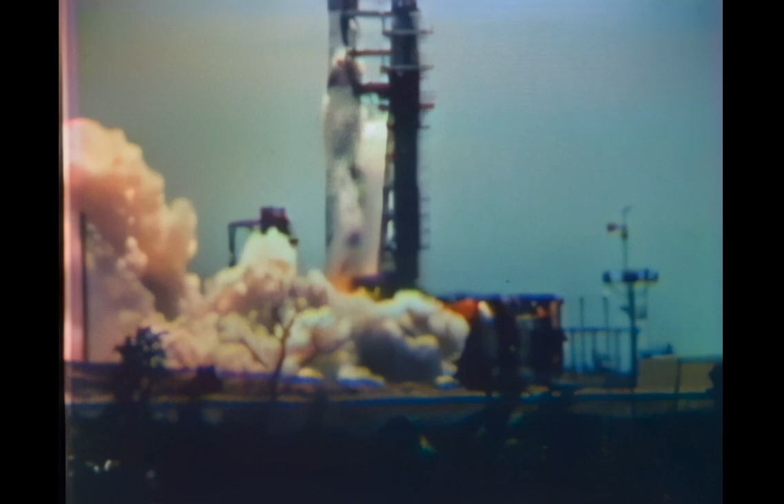And if it is theirs, and this is ours, a better design on the drawing board is no immediate effective countermeasure. Our birds must fly when they're required to. The high complexity of modern-day weapon systems demands the closest possible approach to absolute reliability. There is no second chance. So there must be absolute process control during system design and system manufacture.

Are these more imports from other lands? Or are they more exports of our own manufacture? If we are to compete successfully, both at home and abroad, our economy must expand, our industry modernize, to remain strong, to remain free, to enjoy the good life.

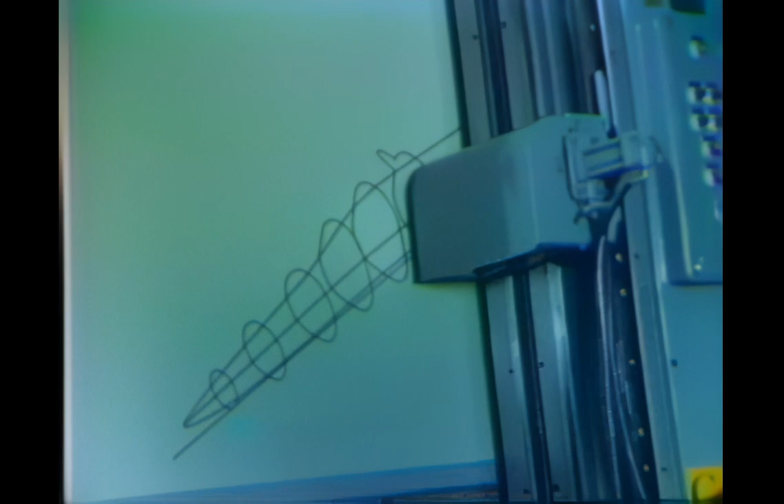We also need newer and better aerospace vehicles, and we need them fast. We need newer and better weapons, and we need to get them from design concept and into operation more quickly, and at a reasonable cost. We need new and better products for civilian consumption, products which can compete with foreign goods here at home or in foreign markets.

We must have modern manufacturing, as modern as we can make it. Modern manufacturing is a command performance. Command performance. Well, we usually have enough command of our process to get the performance we want.

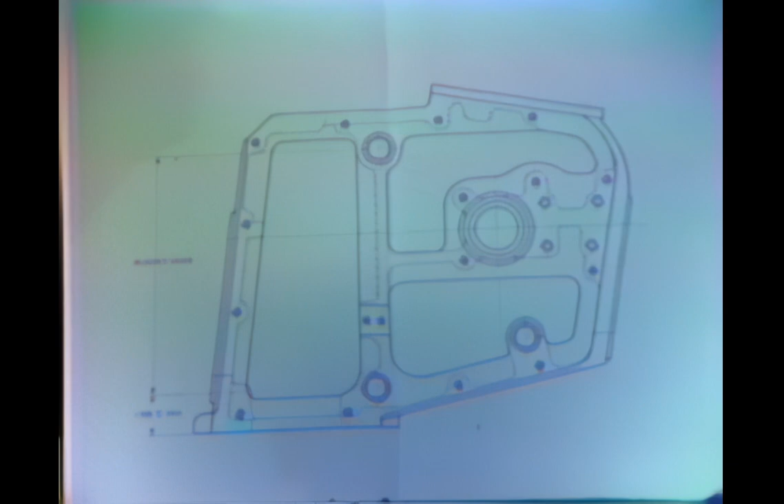Of course, it takes a lot of time to get from a set of new drawings to a finished product. But time is something we don't always have. The period from development to product is growing shorter and shorter. As someone said, time has collapsed.

Now let's try this process. Say the complete product is a Type 20K, and we're changing it with a modification of the Type XR. Now suppose all you needed to do was to say into a transmitter, 3 Type 20K modification XR. Orders to the plant. That's right. You merely define what you want, and in a fraction of the time it would take conventionally, your product's manufactured, assembled, and ready to ship.

And that component we were talking about is only one of many making up the complete product. Well, how could you do all that so quickly? Not only so quickly, but in much less space. You'd need a much larger plant to do this by conventional methods. Oh, this is not conventional. Not at all, this is a modern plant. Really modern? What do you mean by that?

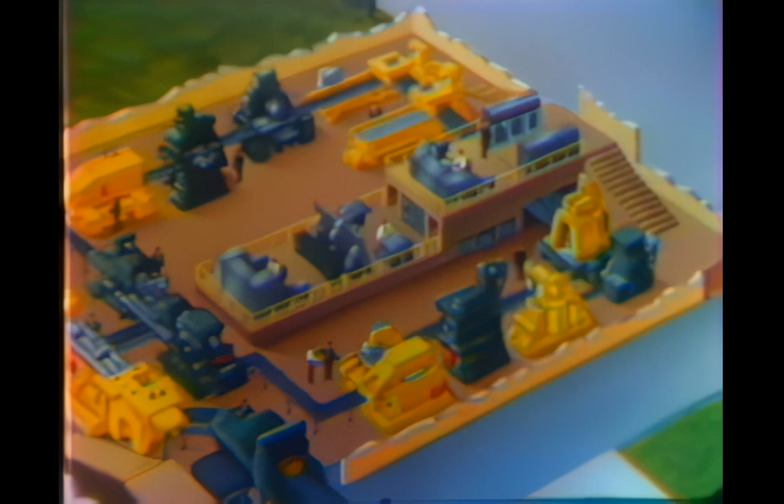When you give your command over the mic, which may be in the plant or remote, almost anywhere, the information feeds into a voice converter, which translates your language into a language which the computer can understand. The computer analyzes your request, then draws on its store of information to produce a series of tapes, which feed into a production control center. This center not only controls each of the machines, but the flow of parts as well, acting as a scheduling unit.

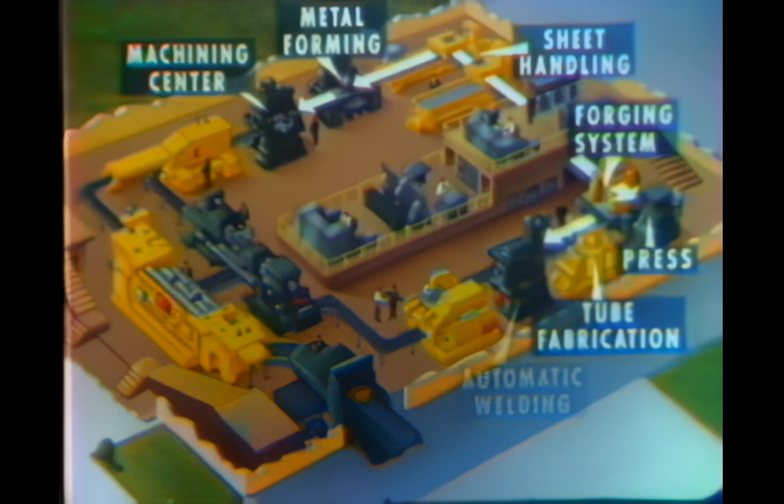Now all of the manufacturing units are actuated. Basic shapes are routed to production centers for complete processing. Completed components are then checked automatically by inspection machines, then sent on to a robot subassembler. Subassemblies proceed on to a robot for final assembly, and then on to shipping. That's what I call command performance.

Of course, I've oversimplified the process a bit. You mean you've been putting me on, don't you? Not exactly, this is not as fantastic as you might think. Take the computer, for example. Computers are fairly common today, although we still must talk to them with cards or tape rather than directly. But they're getting more sophisticated all the time.

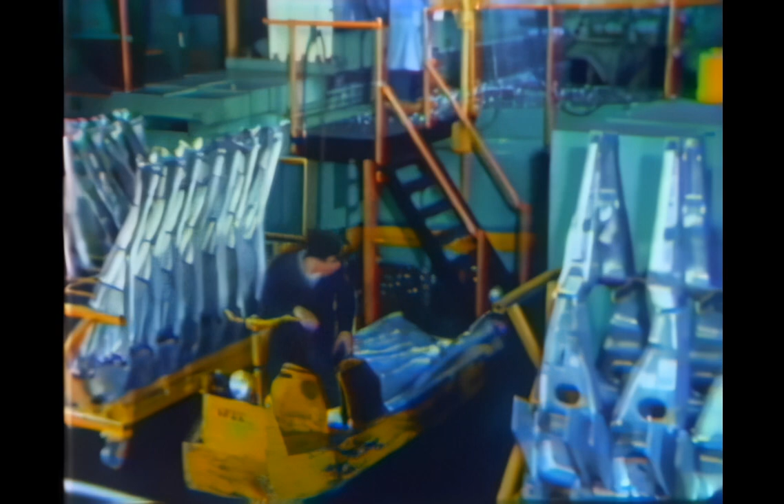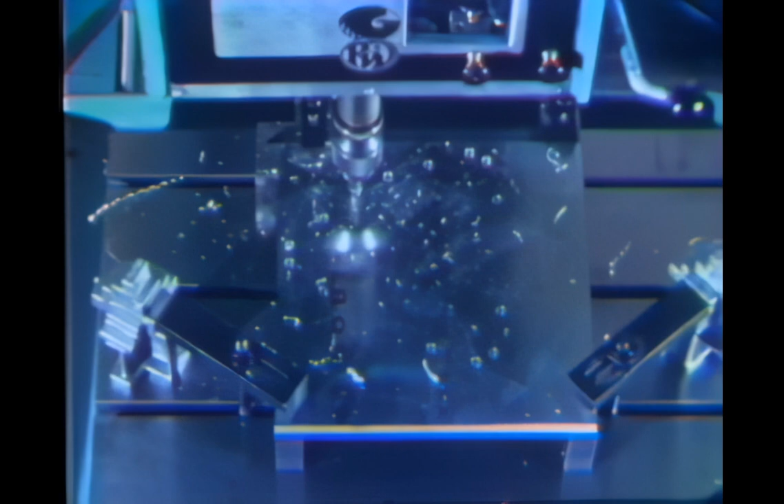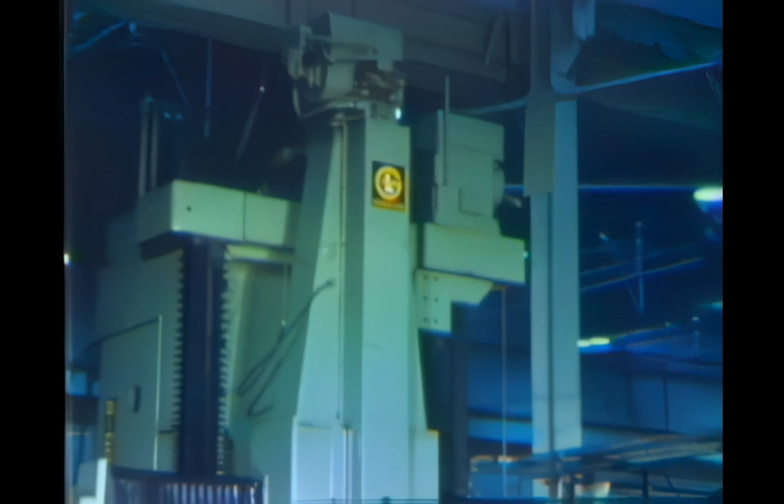And from this information, a control tape is produced. Control tape for what? To control a manufacturing process. Now these machines are in existence today: inexpensive tape-controlled drill presses, the more sophisticated turret drill presses, vertical turret lathes, capable of high-accuracy contouring.

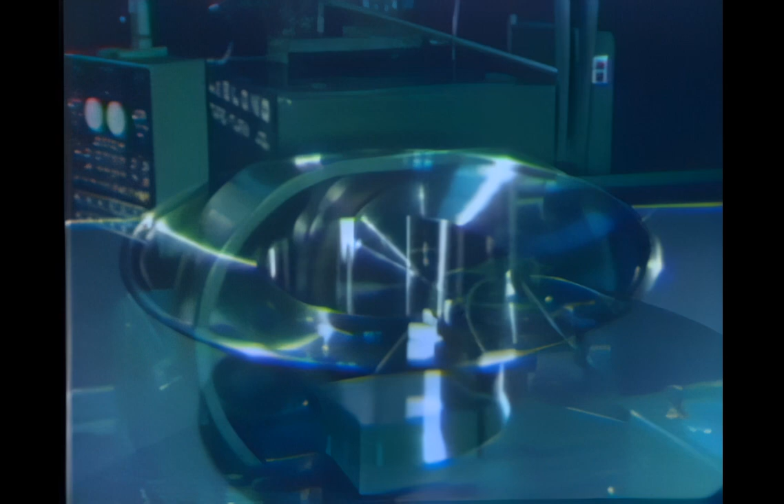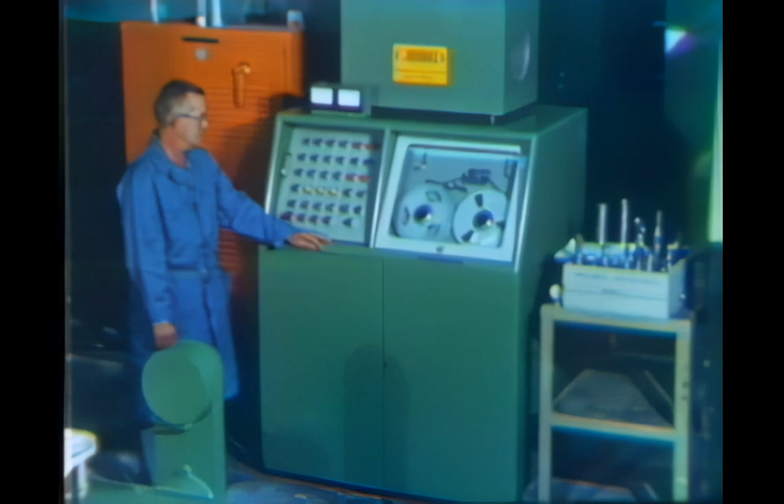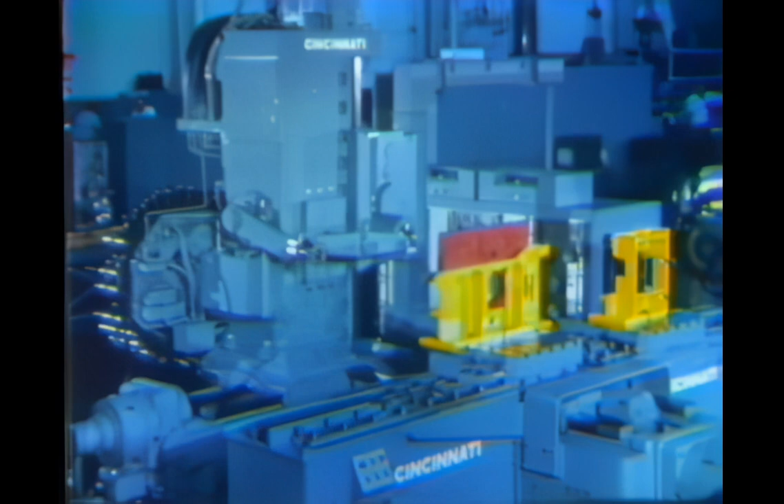Tape-controlled engine lathes, with equally exacting contouring and thread-cutting capabilities. High-precision multi-axis profiling mills. Machining centers that change tools, mill, drill, bore, ream, and tap. In many cases, they can complete the entire manufacturing process in just one setting, fully capable of doing that job of yours we were talking about, and even more.

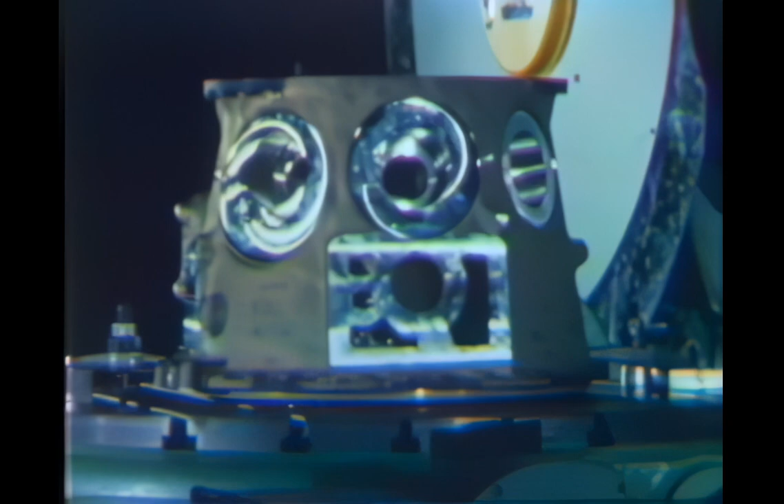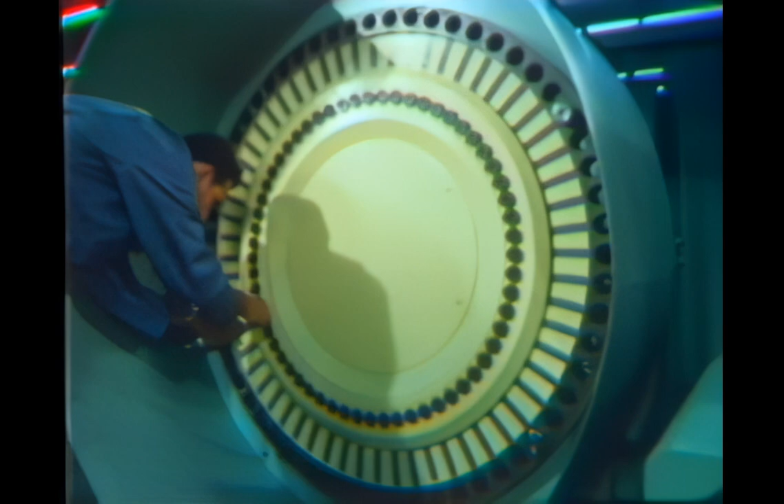Now, what different tools would you need for this piece? 6 different milling cutters, 4 sizes of drills, 4 reamers, 6 taps, and 4 boring bars. And where you needed 8 machines to use these tools, the whole batch is loaded into a magazine for use by this one machine.

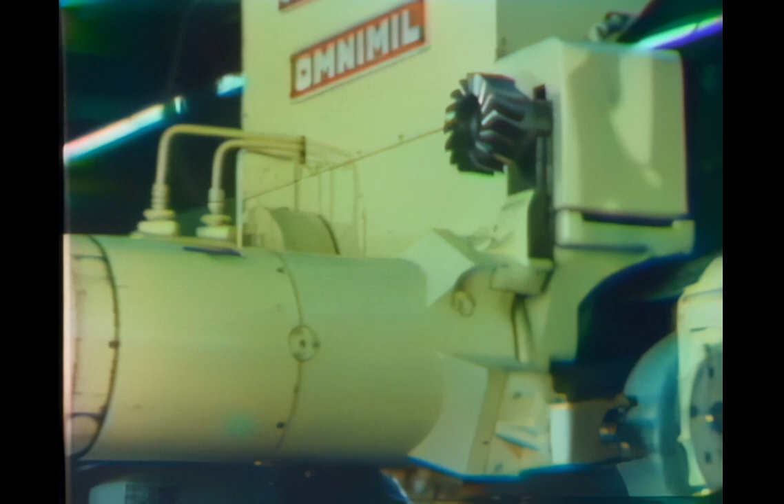All the instructions to the machine are on a punched tape. The intelligence on the tape tells the machine exactly what to do. This is called numerical control, which is one of the means of using mathematical definitions to furnish intelligence a machine can understand. There are many methods of accomplishing this. However it's done, it certainly shortens the chain of command and greatly reduces the opportunities for a breakdown in communications.

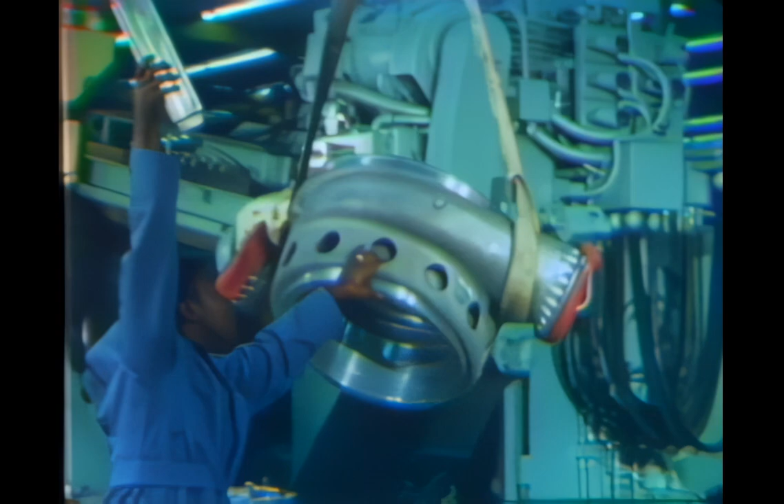There's the same casting you would have started with in your conventional shop, but notice there's only clamps required. The machine itself will even make its fixtures from tape control if necessary. And there you are—all the machining done in only 45 hours.

How long would it have taken in your shop? About 300 hours to machine and 26 weeks of lead time, after you've tooled up. Remember, the lead time here was only 2 weeks. If you need a second, third, or fourth piece, you get them in a matter of hours, all exactly alike. Now that's performance.

What happened to automatic inspection you were dreaming about? That was no dream—they're already in existence too, and research and development are making them better all the time.

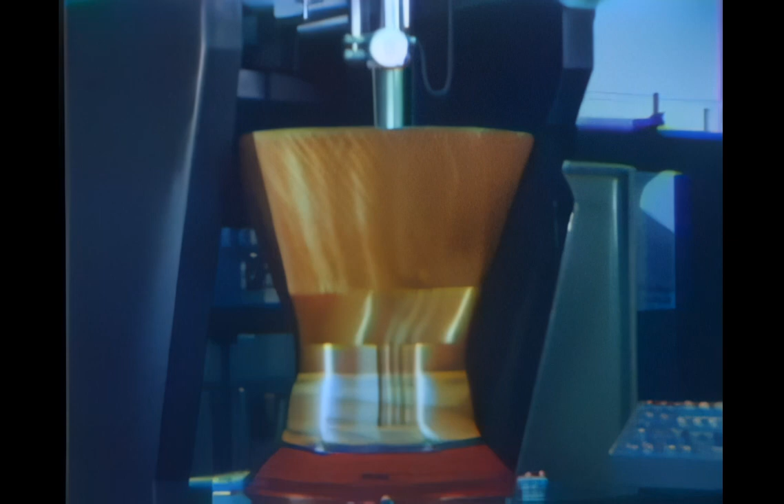On this machine, a probe is guided by a tape similar to the one used in manufacturing the part. The measurements are recorded for inspection and record.

But you still need an original detailed drawing, don't you? Not necessarily, but if you want one, it can be made from a numerical control tape too, operating an engineering machine. Often the drawing can be made at the same time the part is being made, using instructions from the same tape.

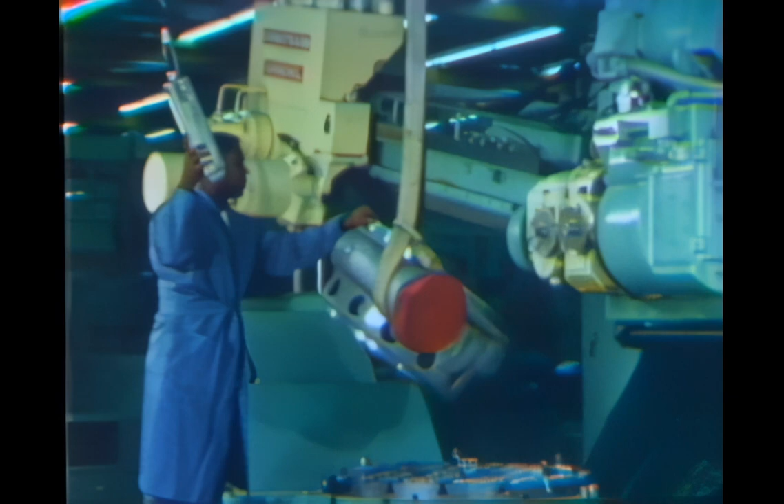I noticed the loading and removal from the machine is still conventional. But it needn't be—you'll find automatic loaders and transfer mechanisms on a lot of production lines today.

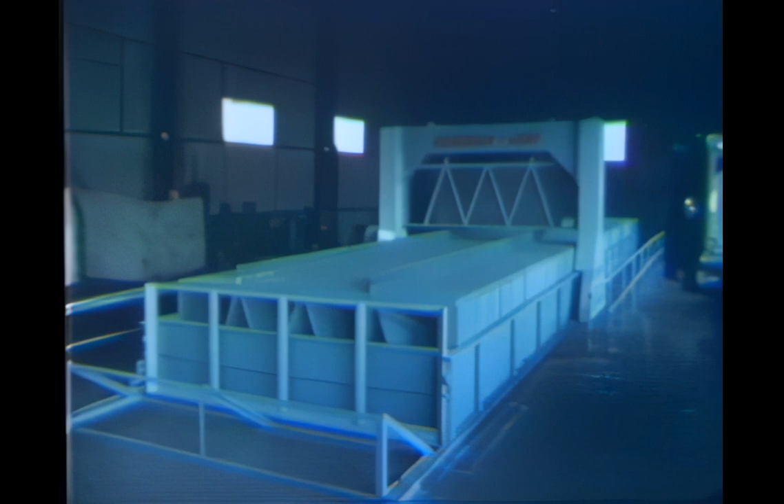This automatic material handler remembers every sheet in its inventory and will deliver it undamaged in seconds.

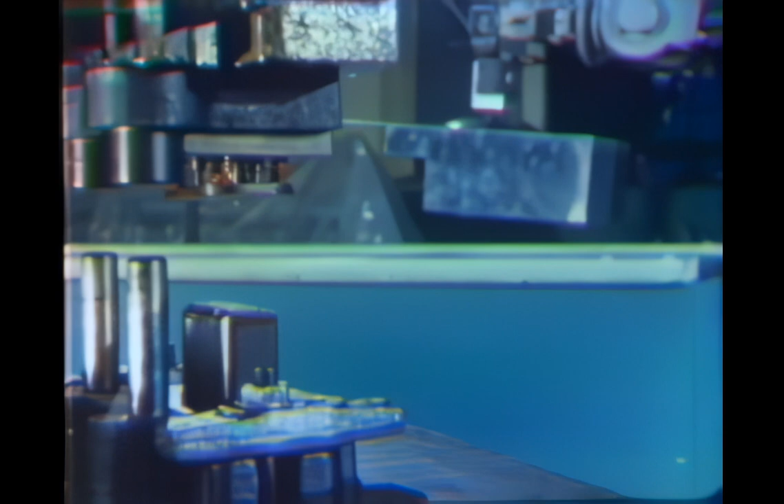This robot manipulator will perform a variety of handling operations. It can be easily taught to load, unload, and assemble parts because of its electronic brain.

So you see, we have practically all the elements of our plant of the future. It's just a matter of time before someone puts them all together to make the dream a reality.

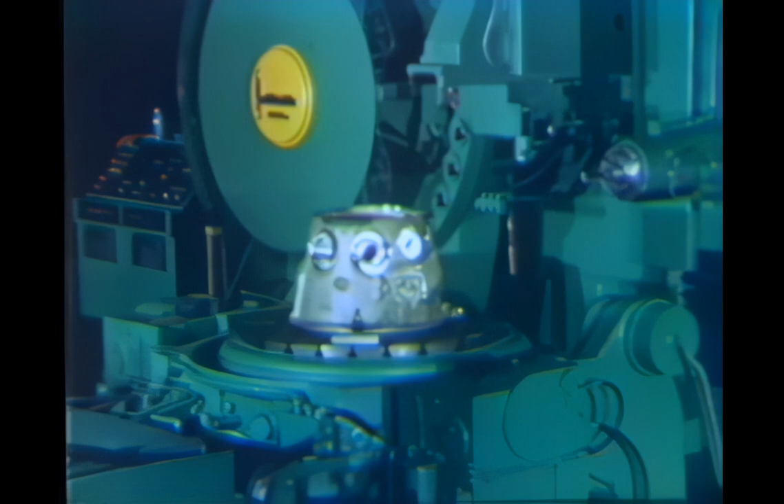I don't know that anyone has ever produced a crystal ball on one of these machines, but you don't need to be a fortune teller to realize that our success in aerospace depends upon our national capability to produce combat-ready systems with complete reliability. We must produce first, best, and at the lowest possible costs, which are consistent with reliability and reproducibility.

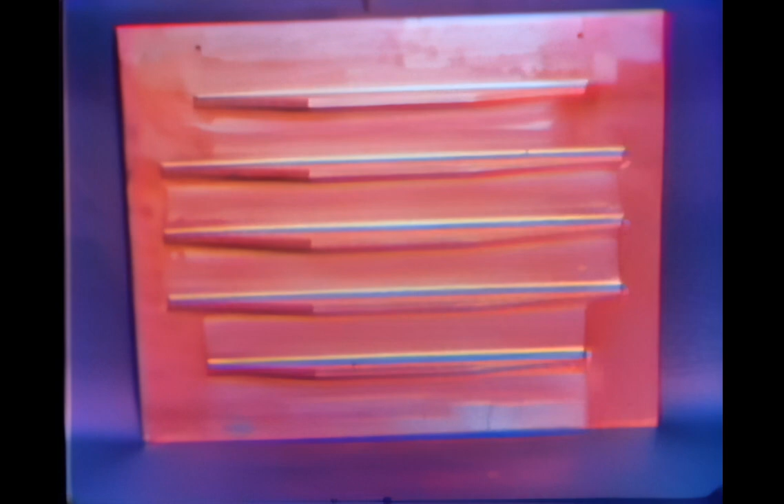This means that we must be able to manufacture from all sorts of new and exotic materials. It means we must be able to produce structural members with a high degree of configuration complexity. It means we must produce with greater dimensional control.

Some large rocket engine inducers, for example, can't be produced to design concept by conventional manufacturing methods. It means that we must produce components which have structural integrity.

This aircraft bulkhead was built up of over 90 different parts, requiring more than 1,000 rivets and high-strength fasteners. You can imagine how long it took to tool, machine, and assemble all these parts, and you can imagine the possible human error involved.

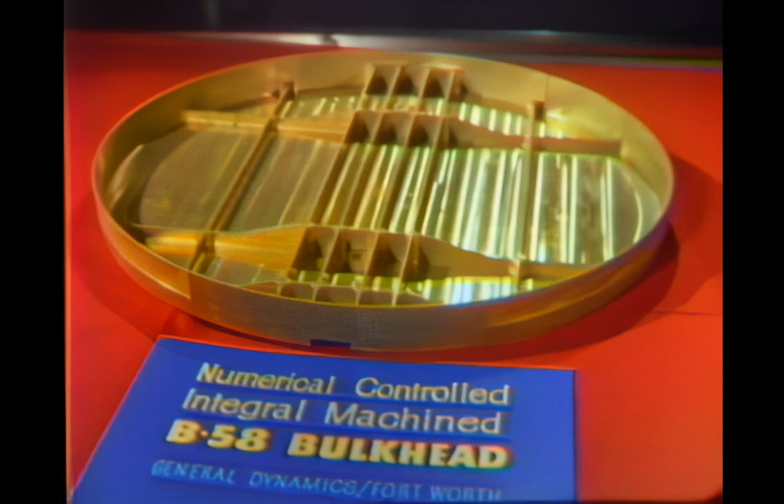The more modern one-piece bulkheads have greater structural integrity, but they were still expensive. These one-piece bulkheads were first produced by conventional methods, using specially designed tracer-controlled rotary tables with many coordinated overlay templates and tracer patterns. It took 160 hours of machining time to produce one bulkhead, and at considerable cost.

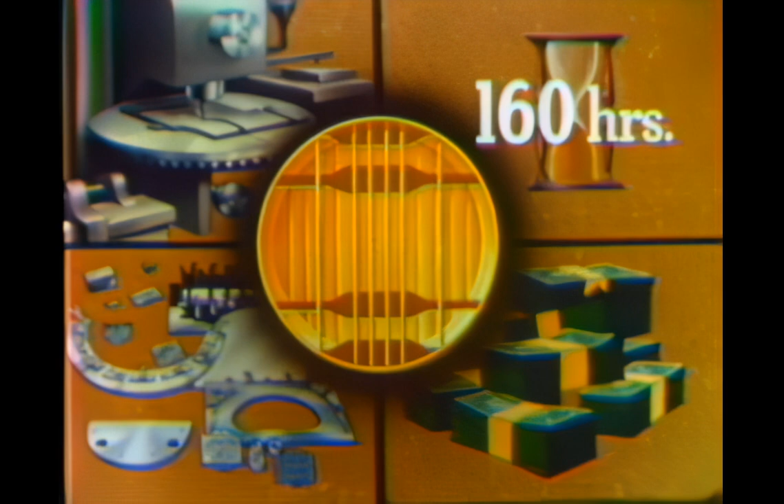The part is now programmed on a numerically controlled skin mill to machine 2 at a time. This requires only 2 sets of vacuum chucks and 9 reels of tape. The time is reduced to only 9 hours per part, and the cost reduced by 80%. In addition, there's a 25% reduction in weight.

Command performance? I'll say. But you can best get it with numerically controlled machines.

Can this type of control be applied to other types of machines? Certainly. There are machines that automatically position and punch all types of panels.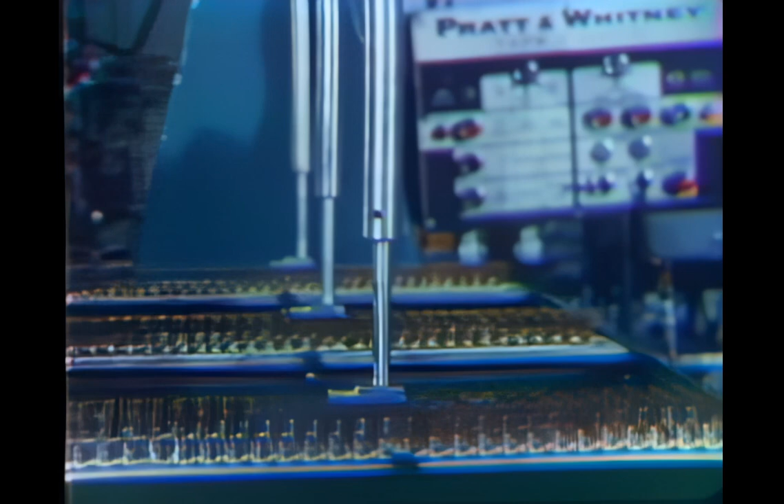Machines that position connector panels for wiring. Machines that position and mate the wiring connections on assembled electrical panels.

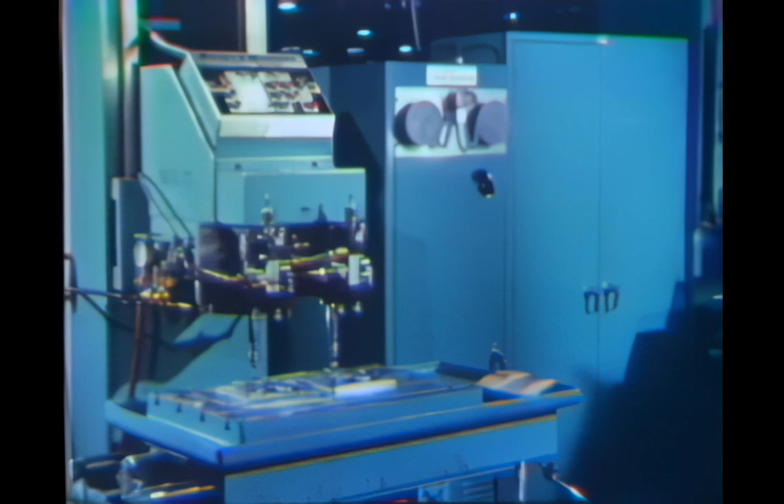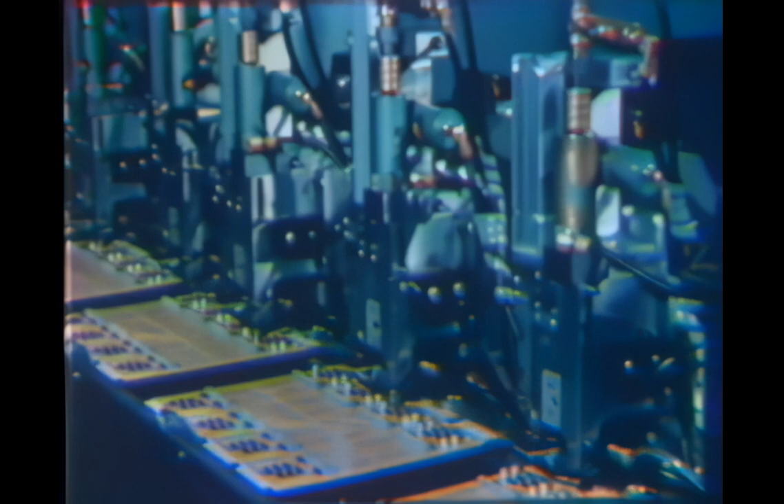Machines for drilling printed circuit boards. Machines for inserting the components in these boards.

Machines for spot welding, which saves 72% in labor costs. This machine has proved invaluable in spot welding fuselage sections.

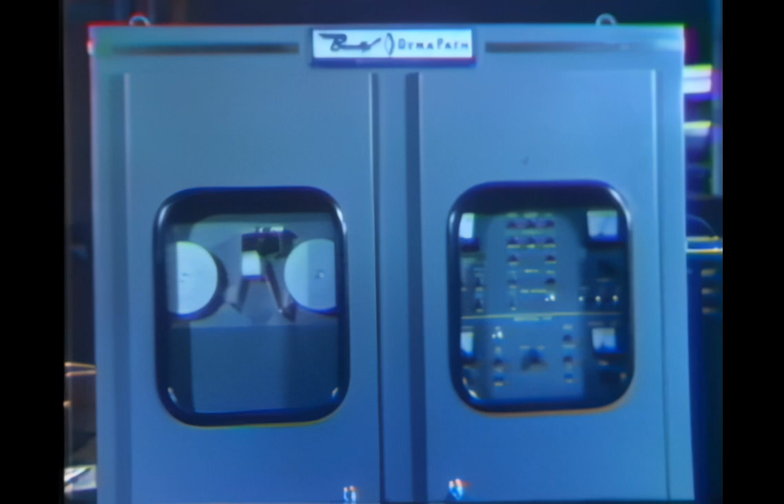The more complex fusion welding also can be performed by numerical control. The tape not only controls the positioning and movement of the arc, but also the welding factors, gas flow, current, and the like. In guiding the arc, the control permits blind welding down through one structural member to fuse it with a hidden member below. The result? A stronger weld, a member with more structural integrity.

A more reliable weapon system.

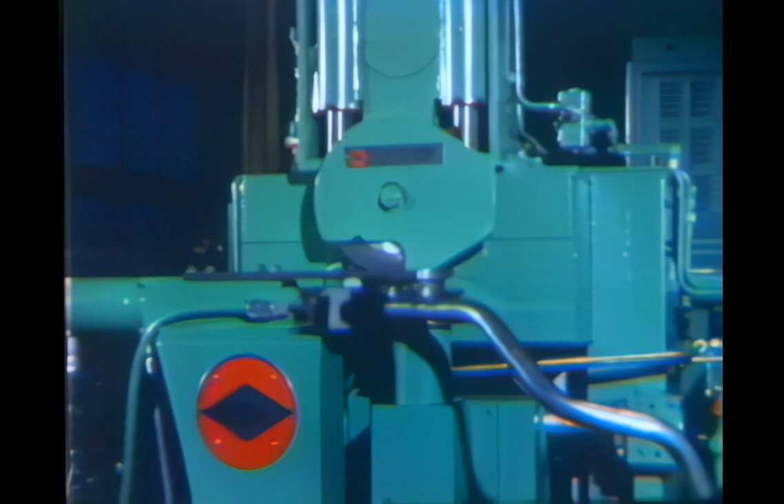Tubes can be bent by numerical control also. Tailpipes that fit any car precisely, or the miles of plumbing used in modern missiles, and all without the need for separate jigs and setup time.

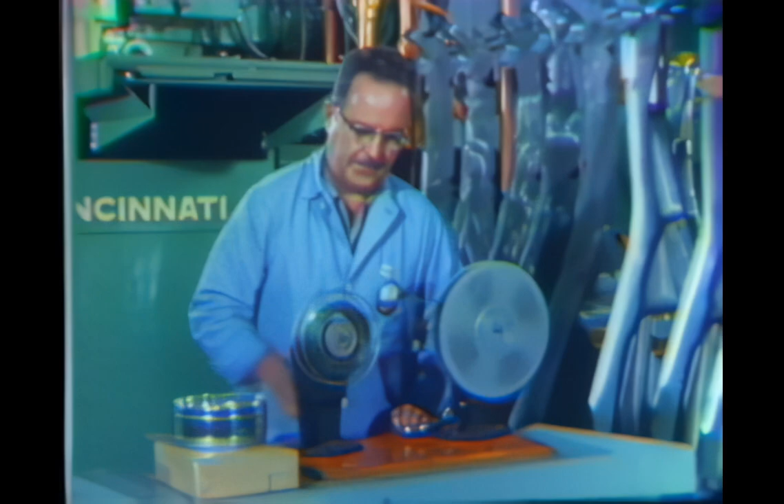Far the most versatile and flexible are the numerically controlled machines. For one-piece or production runs, they're the answer to involved machining operations. And for machining control, you can't beat instructions which are fixed and not subject to human error or emotion.

Why, this tape could be sent anywhere in the world to a similar numerically controlled machine, and it would produce a part interchangeable with the one produced here from this tape.

May we backtrack a moment? Surely. Just how do the instructions get to the machine in the first place? Well, let's begin with your own sketch of some part. Make it complicated, we'll hog it out of a block. Let's use master dimension. Okay.

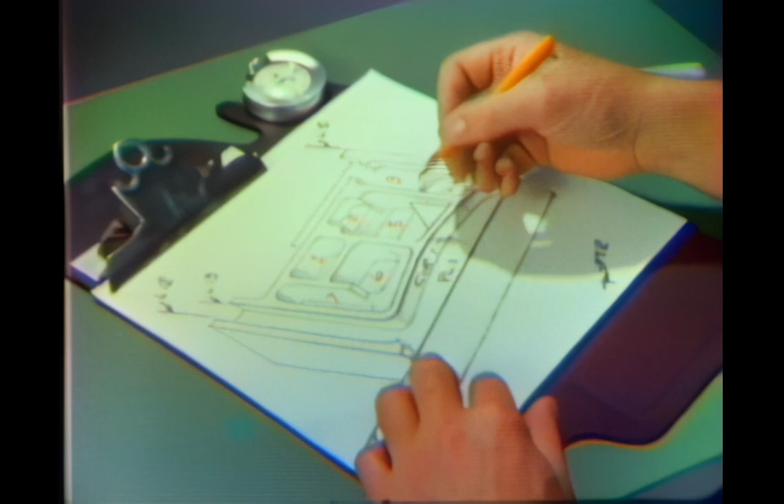There you are, with all the essential dimensions, but scarcely something a machinist could work from. That took you about an hour.

Now we'll take this to a programmer as the next step in tape preparation. And there's the program. Now let's see, that took about an hour and 45 minutes. Add that to the hour for the sketch, and the 5 minutes it took us to get here, and the total's 2 hours and 50 minutes.

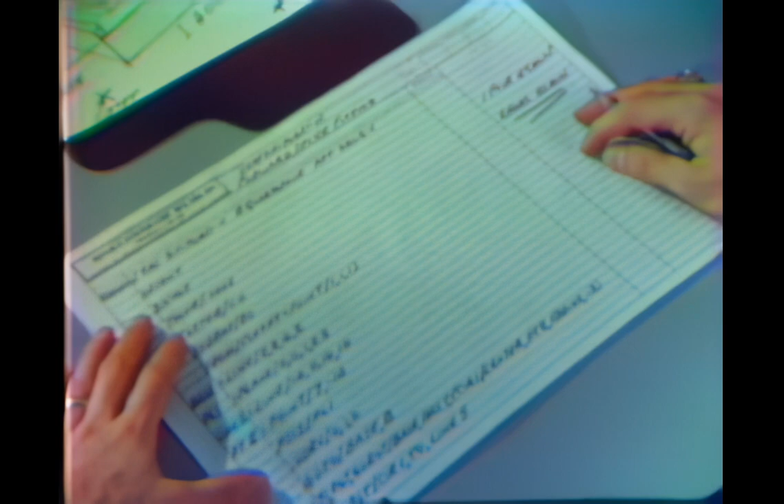Those words on there look sort of familiar, but different. That's right, they're a kind of pidgin English. This information will command the tool to start from the point called set point, which is defined as the point with coordinates 1, 1, 1. With the tool on the right, it is instructed to go right along the line base.

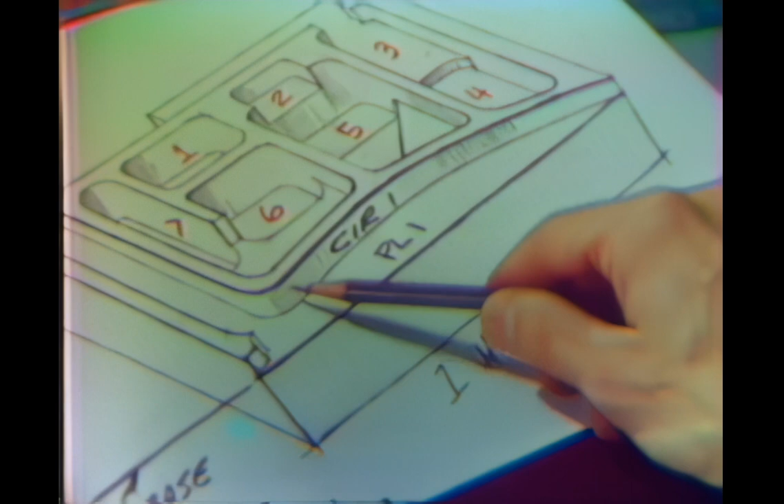At this point in the operation, the tool is sent forward to start cutting a previously defined circle about a previously defined point 2. Now here's that circle on the sketch. You can see it's a language that you can readily understand and use, and one the computer can understand too.

As of now, conventional computers do not accept oral commands, so the instructions are put on punched cards or tape.

We're moving right along. Just 10 minutes for that job, for a total of about 3 hours. Now the computer operator gives the commands to the computer, which translates them into machine language.

And here are the commands we'll take to the machine. We've now spent only 3 hours and 20 minutes. That's really chopping down lead time, isn't it? Yes, I expect it would have taken me weeks to design a tool for this job. It might be a good idea to think about modernizing then.

This whole system's called numerical control. Well, the machines are operated by numerical control. When you talk to a computer though, well, that's a little higher order of communication. I suppose you might call it symbolic control at that point.

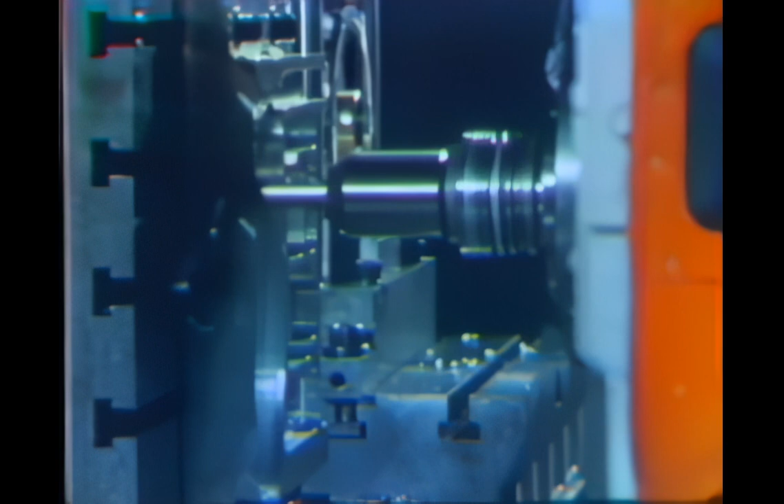But look, your part is already being manufactured.

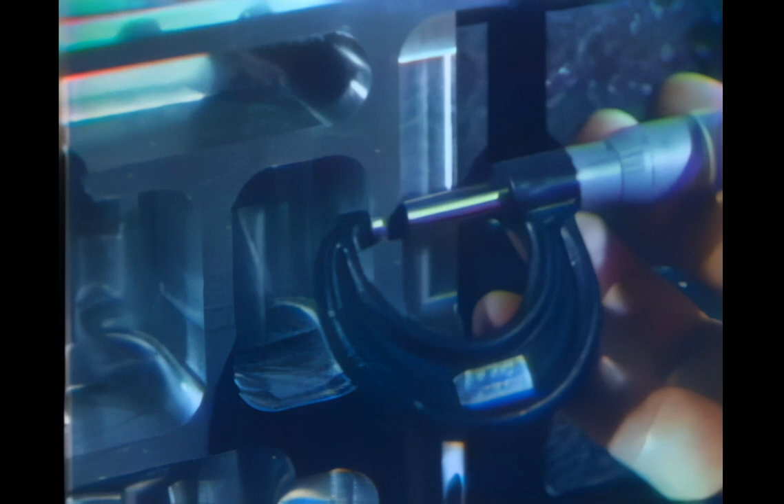There's your part, just 4 hours after you started making the sketch. You want to check it out? You bet. Amazing.

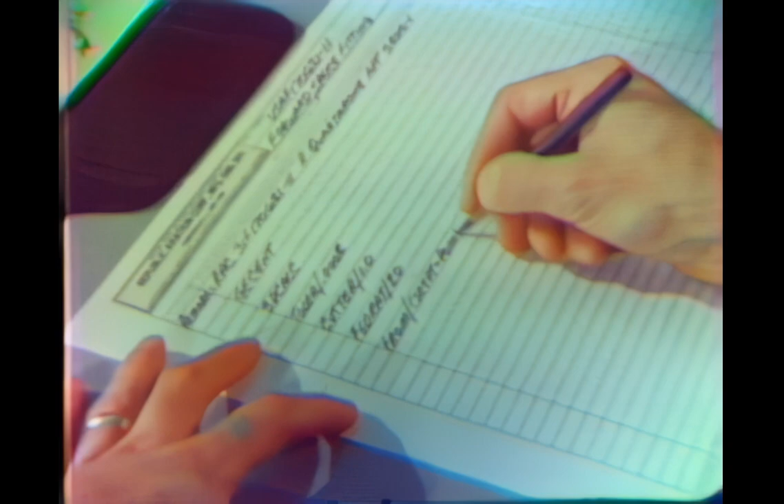Absolutely amazing. You see, what happened was that the machine did what machines can do best, and humans did what humans can do best. You did the designing, the creating. The programmer planned the process from his knowledge of machining and the particular machine. And being human, you were able to start a chain of command to the machine, a very short and very exact chain. As a result, you obtained a superior performance from the machine, far better than by conventional methods.

And you get the same performance time after time, because the commands cannot change. And that's why you call it command performance.

That's right. Well, what about the actual joining, forming, or removal of metal? What's new along these lines? Plenty. Electron beam welding, for one thing.

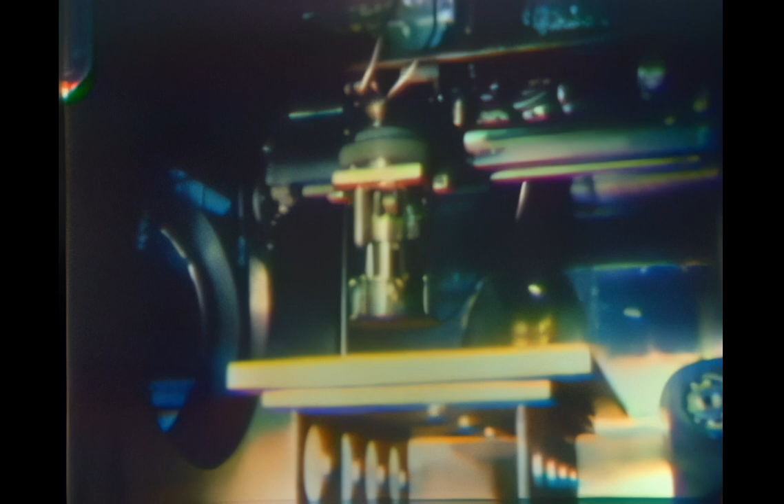Here, even two dissimilar metals can be permanently fused together by the high-velocity electron bombardment in its vacuum chamber.

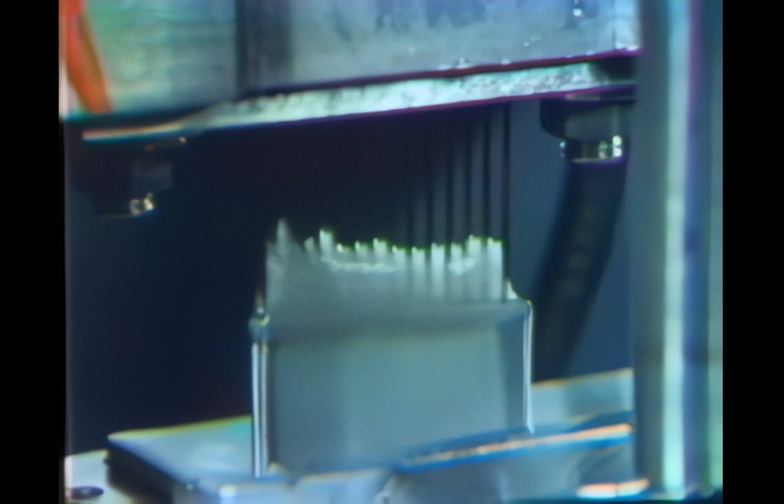Electrolytic machining, for another. The cooling holes in this turbine blade were eroded to exacting tolerances by this stem drill. The hollow drill electrodes never touch the material, so they need not be reset or replaced.

Just the opposite of electroplating, huh? Correct.

This finished turbine bucket was shaped from high-temperature material, and here are the shaped electrodes that were used to do it. The process replaces a dozen conventional machines and produces a yearly savings of about 80%.

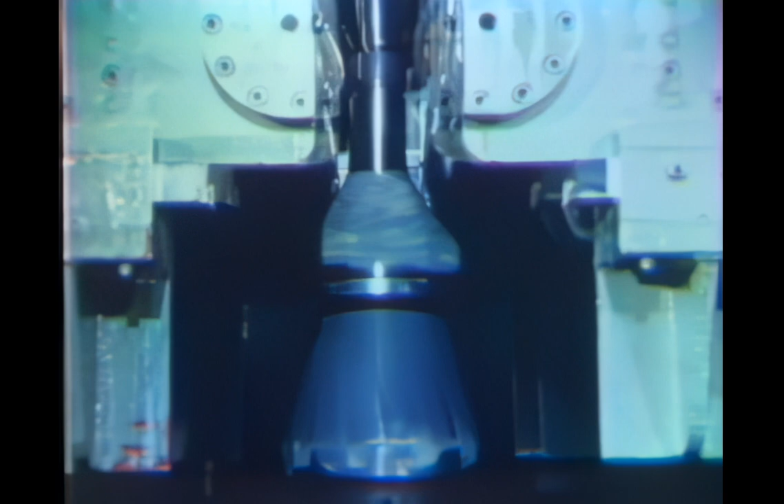When subjected to enough pressure, metals become plastic and are easily formed. This vertical shear former produces turbine compressor shafts at a savings of $1,500 per part.

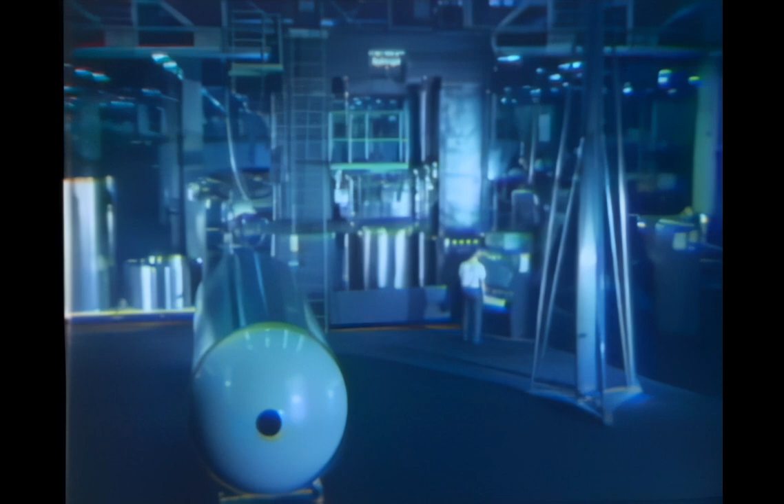Similar machines will turn out shapes such as cylinders, cones, and rocket motor cases from practically any metal, including many of the exotic alloys.

Or suppose your product needs formed parts, like this. This machine pre-stresses metal to its yield point and has a tension control system, so that forming is accomplished with high accuracy.

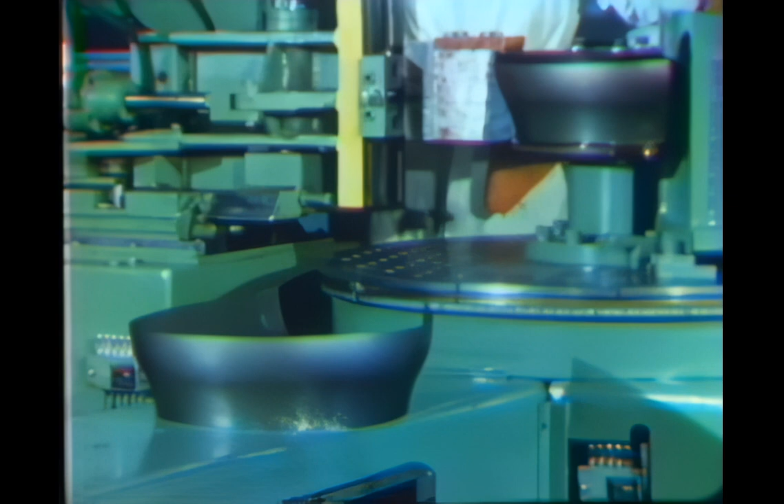This jet engine part was formed from Rene 41 in just 2 minutes, and the savings over conventional methods is 80%. A similar type of process will give you savings of up to 90% on drawn components like this, and permits the use of inexpensive dies.

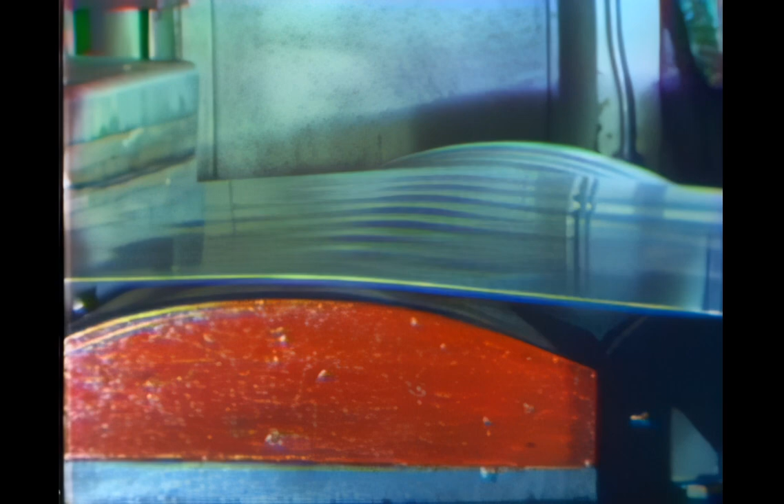This blank holder, adapted to a conventional press, pre-stresses the metal and makes it more flowable than plastic. By adjusting the stress, almost any metal can be formed using the same die.

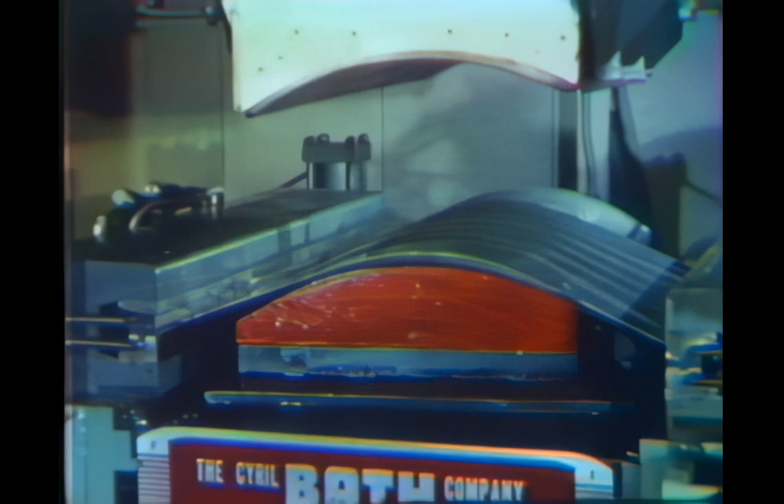Normally, 3 draws would be required to produce this part, with 270 hours of handwork for finishing. But here it is, produced in 1 stroke, holding its shape without springback, and maintaining that shape throughout subsequent welding.

This hydroform turns out complex shaped parts in seconds that formerly took hours to fabricate, assemble, and weld. The rubber bladder reduces tooling to only 1 inexpensive die.

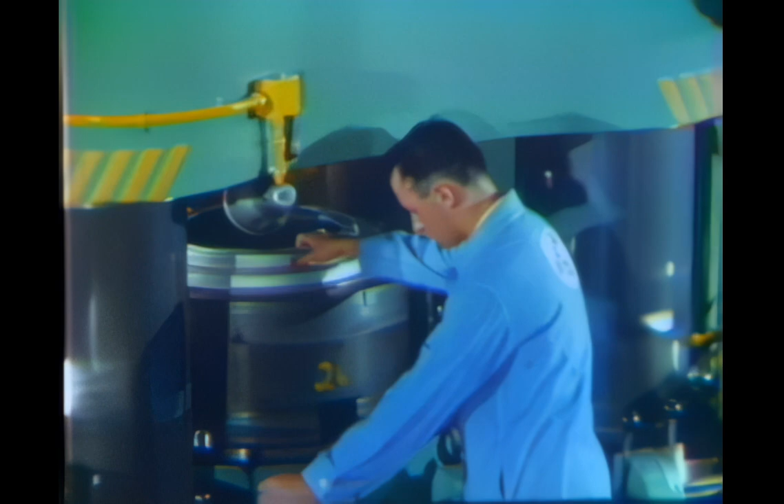Want more savings in forming metals? Perhaps electromagnetic metal forming is the answer.

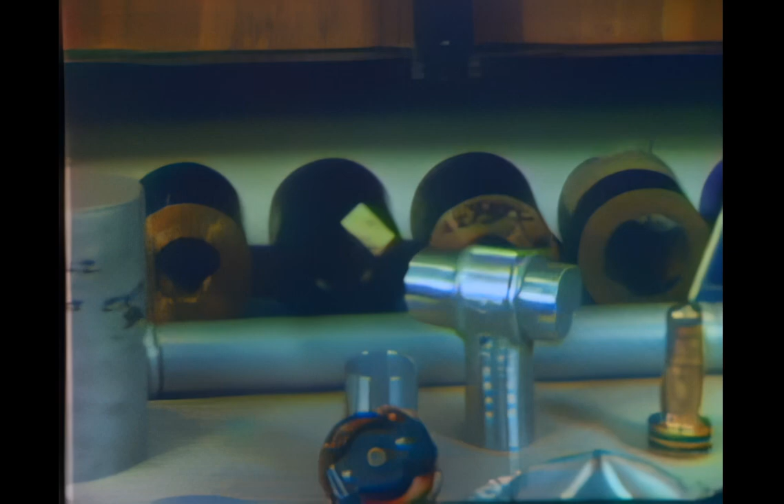Now, this process uses powerful magnetic fields to swage, expand, compress, coin, shear, and assemble conductive metals without mechanical contact with the work. This machine uses the explosive power of man-made lightning to form parts.

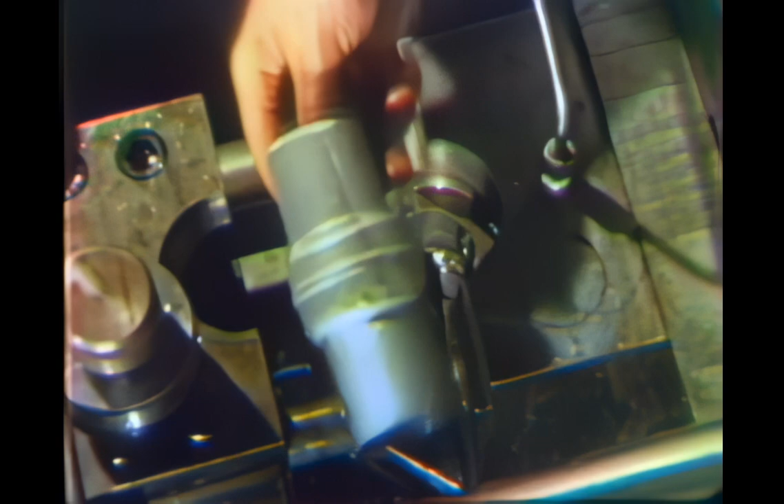What about forging? How about that? That's high energy rate forging.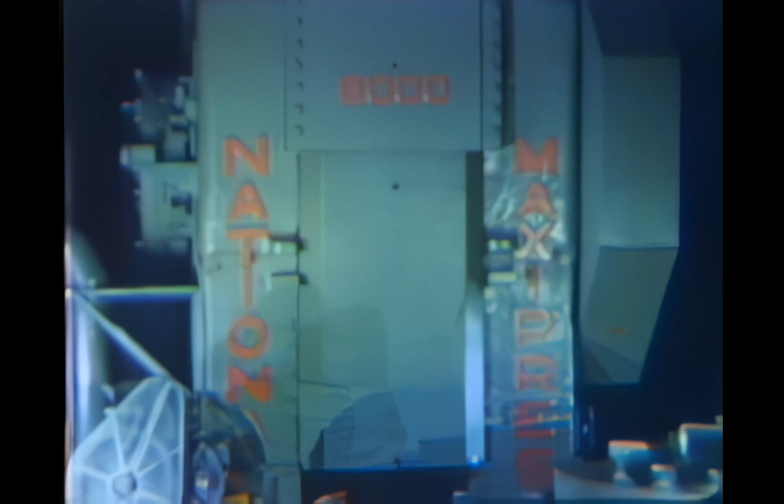These machines will deliver a terrific amount of energy in a split second to forge such materials as tungsten or even cast iron, as well as the usual materials. High-tonnage mechanical presses also offer great savings in the production of precision forgings.

For testing electronic systems, there's automatic testing equipment. Here's a complete checkout of a wiring harness. This machine checks missiles, computers, servo systems, and the like.

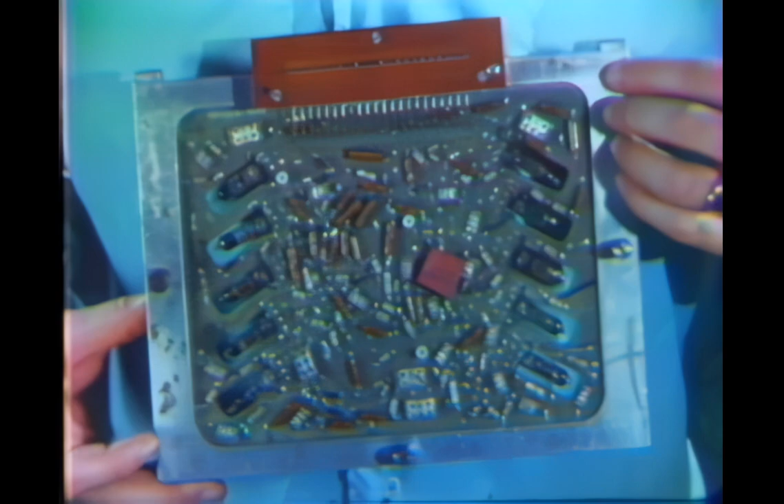The results of the tests can be recorded on a printed readout. And the savings? Well, in addition to the time, this piece of equipment replaces 150 separate pieces of test equipment required on many of the complicated checkouts.

Imagine what all these methods of modern manufacturing are going to do for the designers. And of course, you've seen only a few of the many new methods available today.

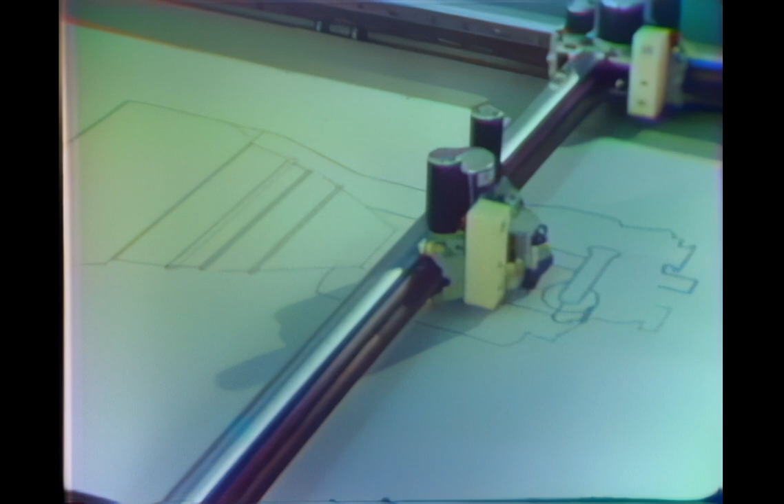No need for them to be limited by the restrictions of conventional manufacturing. They can now design a part to do the best job without compromise with manufacturing limitations.

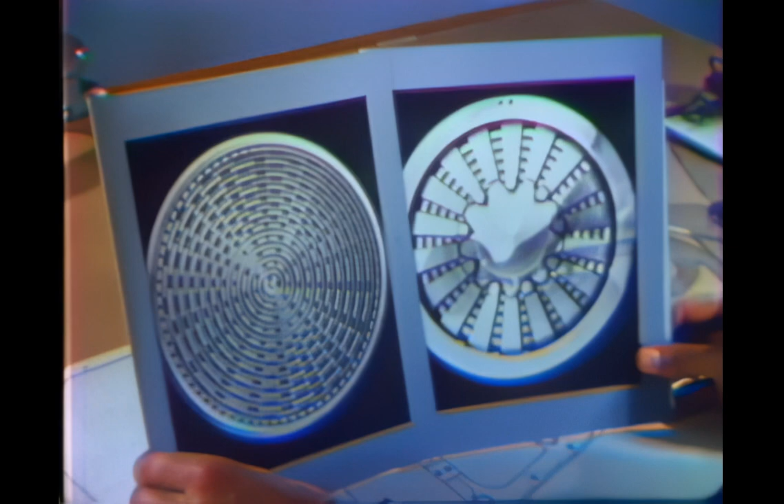I doubt if there's a machinist in the world who could have turned out this part and met the required specifications. Yet it's a vital part. And I know that without modern machining, it could never have been produced in time to get our missiles in operation on schedule. And believe me, we must be on schedule in these areas.

You know, today in some sections of the world, the smelting of iron is still a primitive process. And metal forming is equally crude.

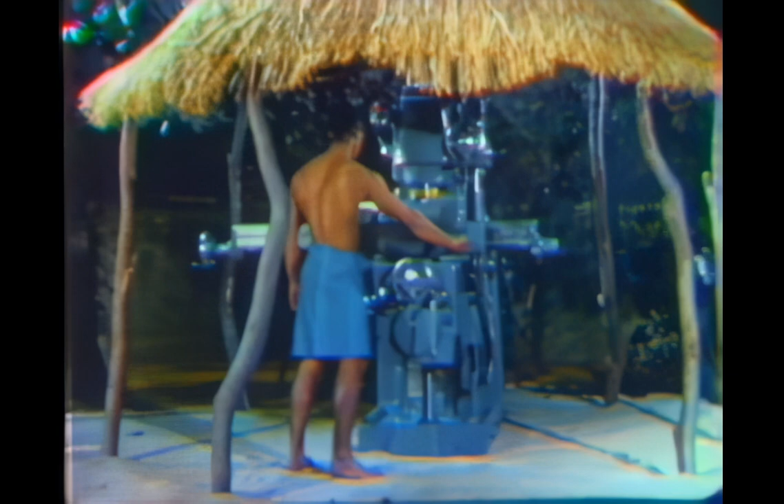But some of our manufacturing processes still border on the primitive. While even the most modern standard machine tools are efficient for general applications, they will not readily accept the numerical control input so vital for the effective production of aerospace vehicles.

We must modernize our manufacturing methods and go from design concept to finished product as quickly as possible. We must keep the wheels turning the best way we know how. We must apply what we know today and search for ever better methods.

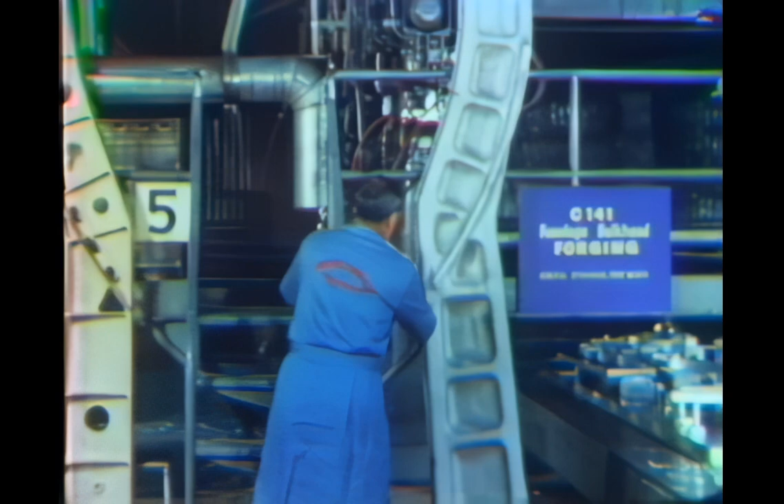This is a command performance for the survival of industry and our country.

Say, do you still have that clipboard? Sure. Here it is. Why? I want to write myself a note so I won't forget something. See? This is going to be a command performance, too.

Good idea. Because the Defense Department expects its contractors to maintain a modern base in their facilities. In keeping with the advance of aerospace technology, we need the productivity, reliability, and repeatability that only modern manufacturing can provide. And we all need the savings which can be effected in both time and money.